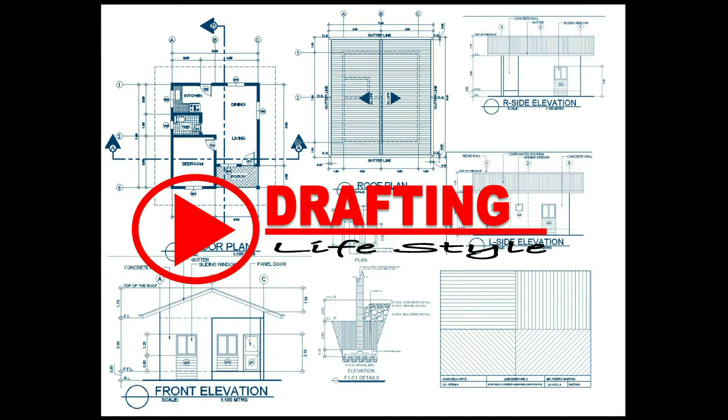This week, I'll teach you how to set up A3 paper, which will give you another option of a printable paper space or size that can be used for your AutoCAD works. This video tutorial was requested by my students to have at least an A3 paper size for their upcoming project. How are we going to start?

Of course, we need our AutoCAD here, and I have prepared some drawings that we are going to need to plot our work on an A3 paper. As you can see, we have here the floor plan, roof plan, front elevation, rear elevation, left and right side elevation. So we already have one of the most important components or requirements in a working drawing, or part of an architectural working drawing. So, without much ado, let us start with our work.

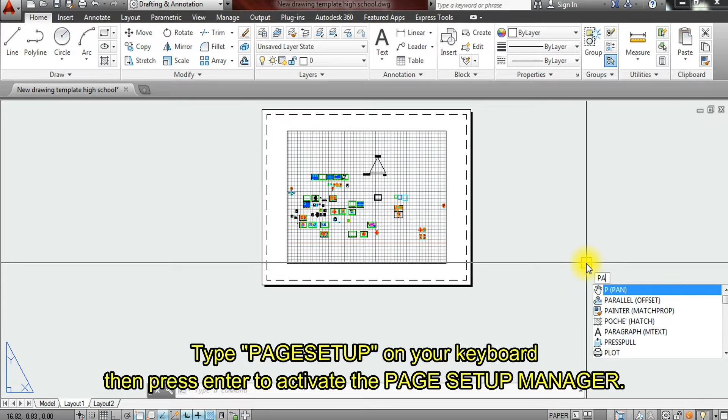So here, we have to click on the layout space because in the layout space we will do our work on the A3 size. So how are we going to start? Of course, by right-clicking here, as you can see, Page Setup Manager, or simply by typing Page Setup, enter, and then we will be directed to the Page Setup Manager.

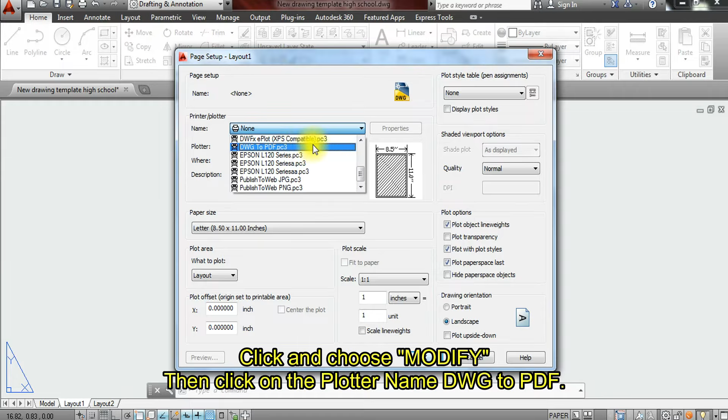So here we have Layout 1. What we are going to do is click Modify, and automatically here we are going to have the DWG to PDF. That's the format we need to start with.

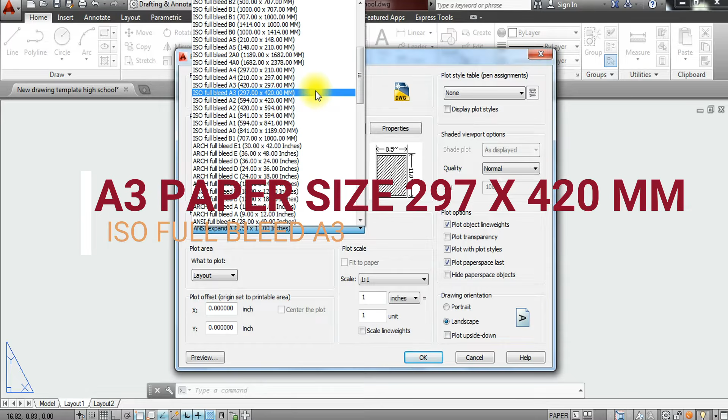After this, we are going to look for what we call the ISO Full Bleed A3. So what are we doing here with the ISO Full Bleed A3? The size of an A3 paper is 297 by 420 millimeters. This is the standard size of an A3 paper.

So what you are going to do is just click here, and then to edit the margin space or printable space of our A3 paper, we're going to have properties, then custom paper size, add. Now here, we are going to start from scratch. Make sure it's checked or ticked, and then click next.

Now, since we already set up in a previous video the short bond paper, long bond paper, and A4, and now we have the A3, everything is already set up here.

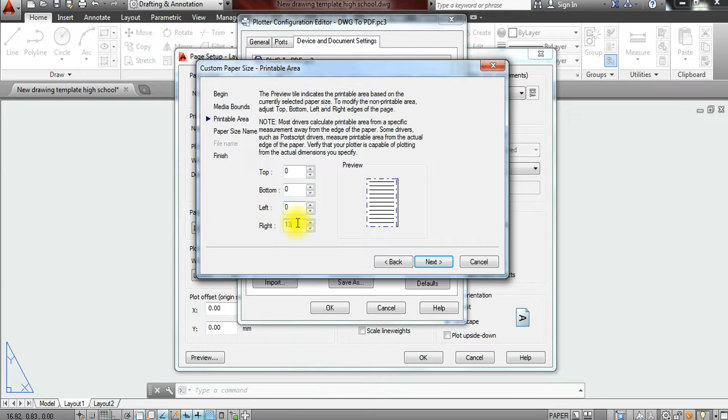So in the last video, when we talked about A4, we already changed it from inches to millimeters. Once that's done, just click next. Convert everything here, the margin space or printable area, into 0 so that the whole space of the paper is printable. So I'm going to change this into 0, change the value, and then click next.

So what I'm going to do here, when we get to the paper size name, we are going to change the name of the paper. What should we do? Type, for example, 'my new A3 paper' or 'my A3 paper size,' or whatever file name you want.

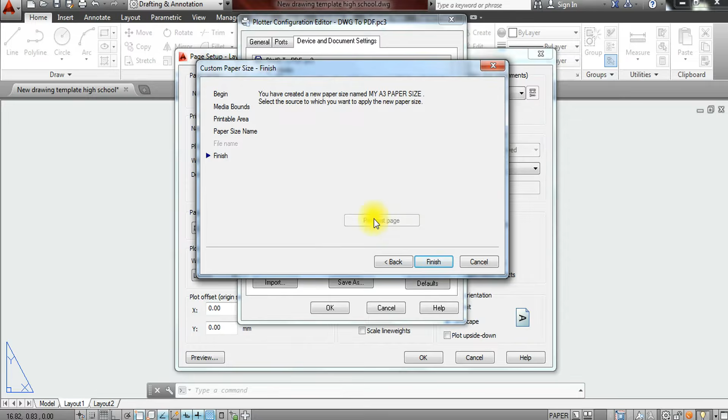Then click next, and sometimes DWG to PDF shows up, and when we click finish it doesn't get approved or doesn't let us finish. So what you have to do there is just add a number, like A1, 2, or 3, so it will accept it. Once you've done that, just click finish.

Then you just press OK, and then you are going to look here in your paper size for your A3 paper. As you can see, I have prepared many A3 paper sizes and different paper sizes that I'm going to use for my work. So here, A3 paper size.

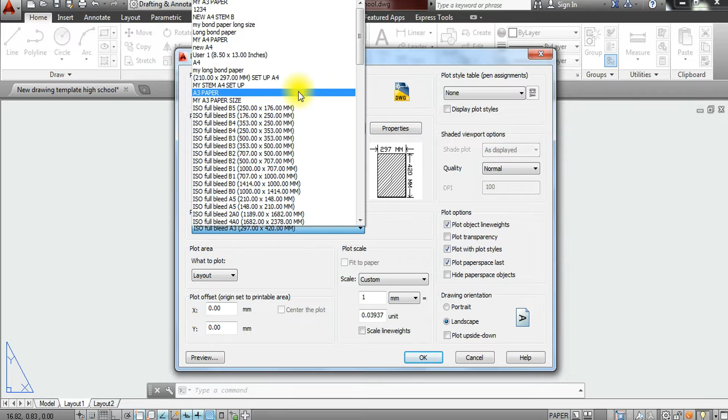Then here in the scale dropdown, you have to choose 1:1. Once it's automatically set to 1:1, you have to choose what kind of plot style table you are going to assign for your work.

So in my first attempt, I chose monochrome. This time, I'm going to choose ACAD, but you could also change this along the way if you want a monochrome setup. Of course, you know what monochrome is - that's when we want pure black and white work only. But if you want ACAD, that's where all your assigned colored layers for your work will show up.

So once you are done here, we won't be changing anything else in the layout.

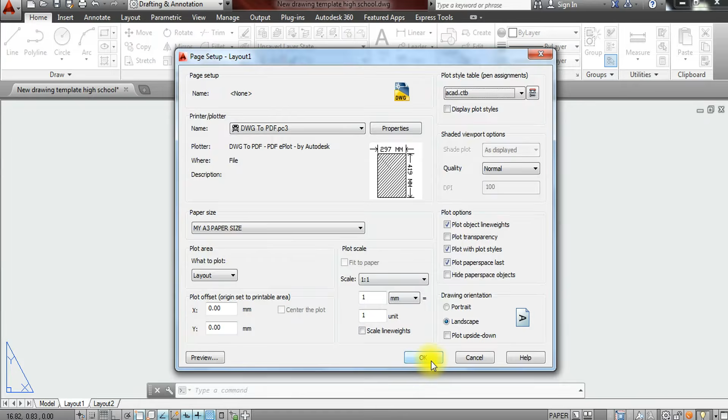And then you just press OK. Now here, modify the layer - don't need to click modify, just have to click close. Now as you can see, our M view earlier has shrunk.

So that's our viewport. What I'm going to do is erase this one, because we don't need that M view. So we'll create a new viewport. I'm going to rename this by right-clicking, rename, for example A3 paper - A3 for me.

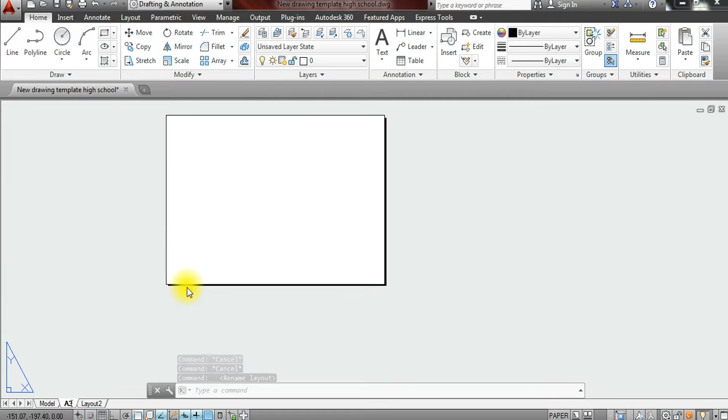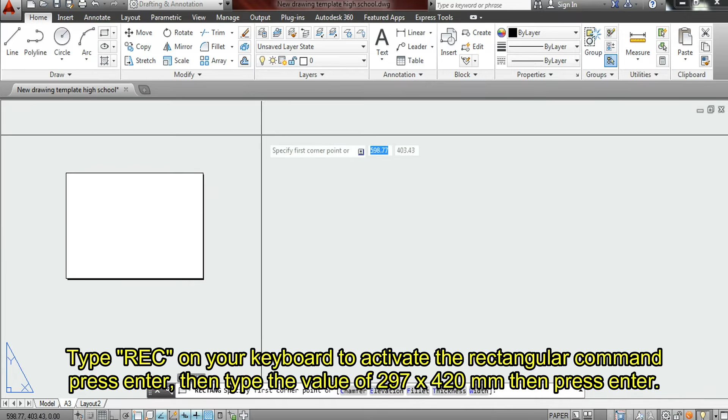Now here we will start with our new borderline. Since A3 is bigger compared to A4, both long and short sides, more drawings fit on A3 paper. Remember, our size is 297 by 420 mm. So we'll draw a rectangle by pressing the rectangular command, and I'm going to type 297, tab, 420 mm.

Since this is in landscape form, you can just rotate the drawing to make it landscape. Earlier it was portrait, so we have to change it into landscape, then move the drawing and target it as much as possible to the edge of the paper. Just click here, point the mouse pointer to the edge of the paper, and boom, we already have our rectangular object along the edge of the paper.

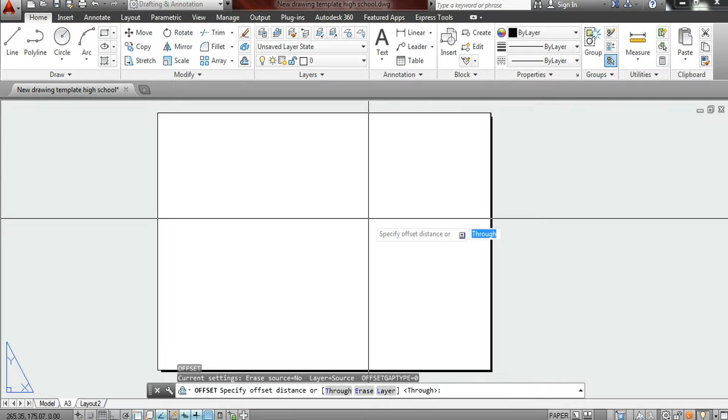Now let's create a border here. Since we are working on layout space, everything changes into millimeters because the paper size we're using is in milli. So I'm going to create an offset command here using 10 - 10 millimeters is equivalent to 1 centimeter. So let's just click it.

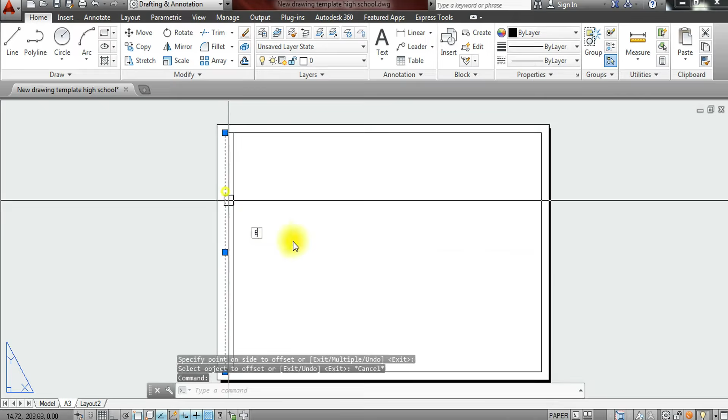And then explode the inner box that we have here. I'm going to create a bigger space of border on this side, at least 10 again. You could increase the size of this border or margin if you want - some use 25, some use 40, that's fine too. Once we're done with that, I'm going to highlight this inner box that we created.

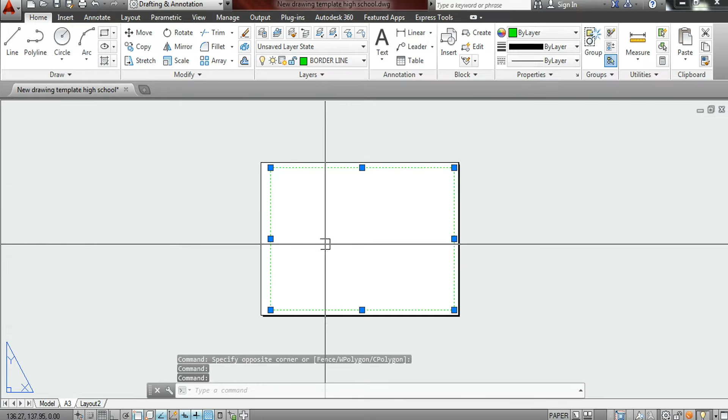And then I'm going to change our layer right away into border so it can already be a thick line on my paper size. Now let us focus on the blocks here, because it's the new title block and border line that we are going to have.

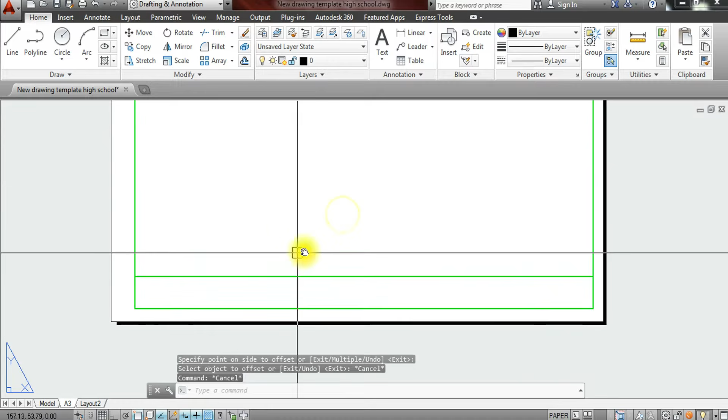So let's offset into 25 and pick the line at the bottom going upward. Once we have it here, remember, when you want to stop the existing command, always press escape - one of the things a draftsman sometimes forgets.

So let's offset again for our size here, for the text - we have 5. And we're going to offset here 25 on both sides, 25 going to the right, and then one going to the left.

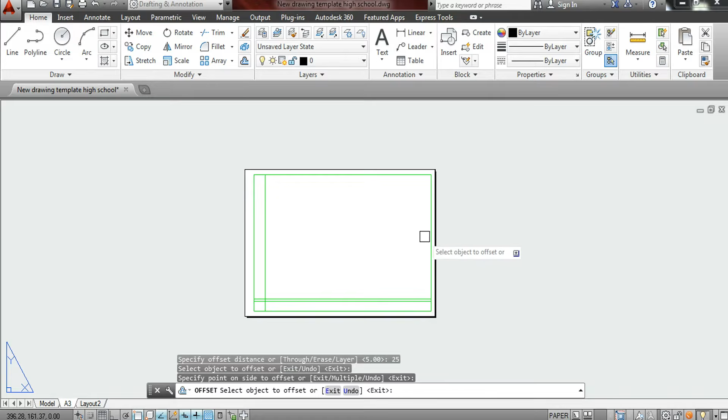Now here we are going to create an offset of 70 millimeters, 3 times - 1, 2, and 3. This is where we're going to place the names: who prepared, recommending approval, and then approved.

Because this is one of the tasks of our students, who will submit an architectural working drawing of their own desired floor plan, including roof plan and the 4 elevations - that's our requirement for them. Which means they are going to prepare 3 signatories.

So let's offset at the bottom by 5 for the descriptions of each part of the names, including the project title we'll place as the location. So we already have our divisions of borders, which means we are going to proceed by placing text.

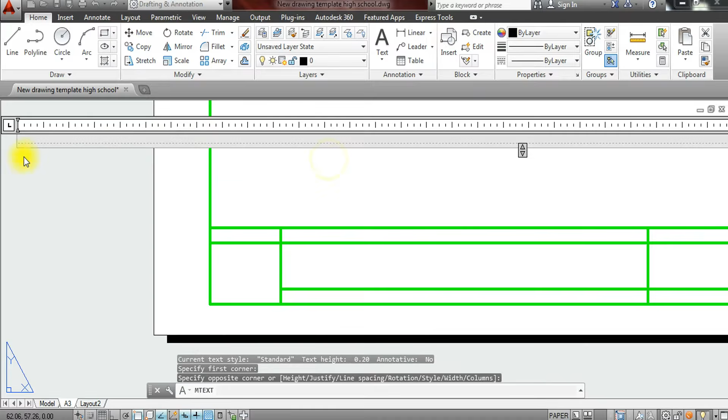Of course we already covered how to place text in the previous tutorial, but we are still going to apply the same procedure here. Click and drag, and then I'm going to type here 'school' and a colon, then highlight the text and change it into 2.5.

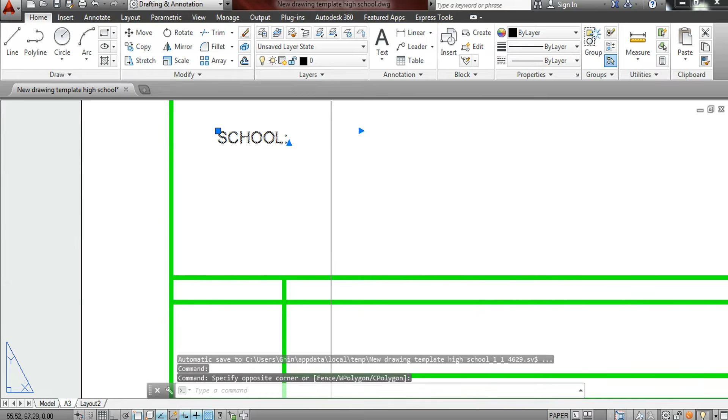Remember, everything now here is in milli. As you can see, the text looks big, but when you click outside, the text is actually small - this is only 2.5 millimeters. So layer it right away with a text layer, and I'm going to move the text to its desired position, here.

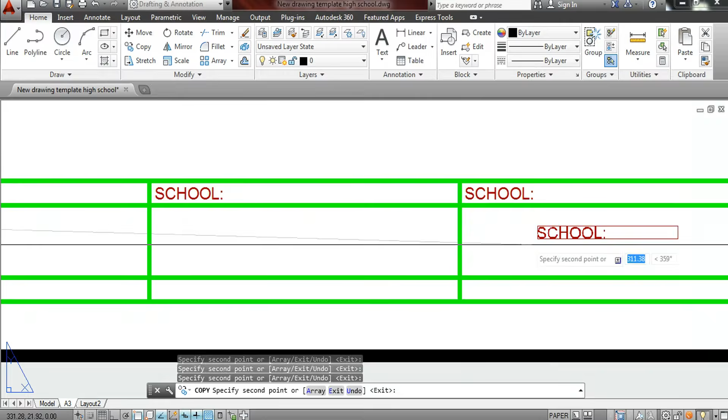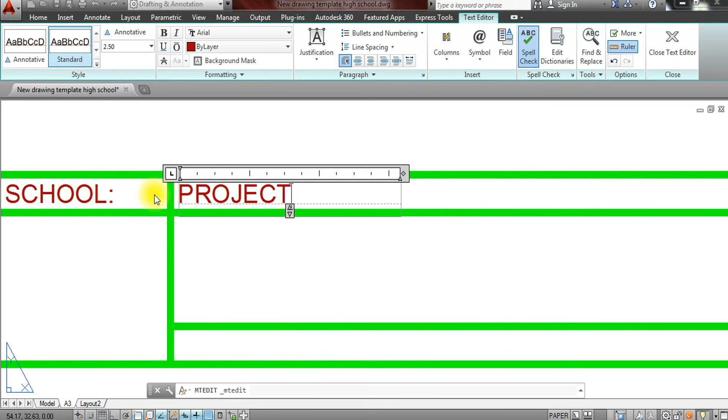And then I'm going to copy this 'school' label to all the parts we have here, and we are going to edit it right away. Let's click it first with a base point. Now here in the first one we have 'school', in the second part we're going to place 'project title', with a colon, and then here 'prepared by'.

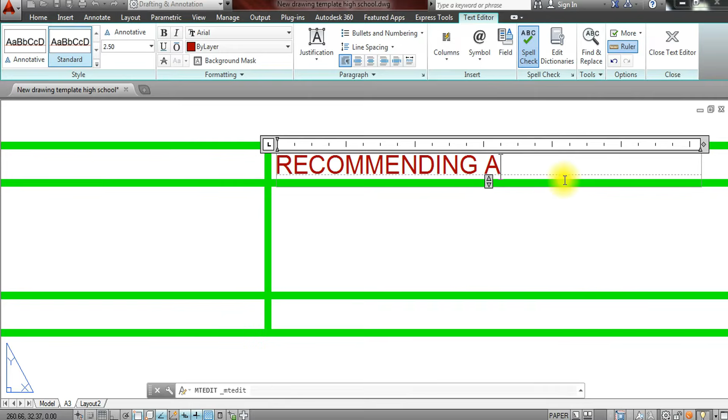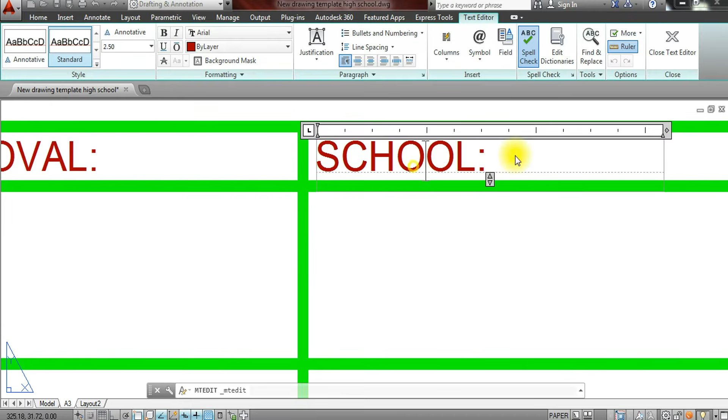The next we have here is recommending approval. So if we are going to work on a company or a firm, this is the second in command of the organization. Recommending approval is your boss, next to your highest official. And then for the last, approve, which means the highest official of the entire organization. So approved by, but for our school purposes activity, I have it here.

So prepared by the students. Here we have the parent's name and then the one who will check. You could also change it if you are going to have it on your school, depende on what you want to do. Depende kung paano ang format ninyo, maraming format ang pwedeng mangyari.

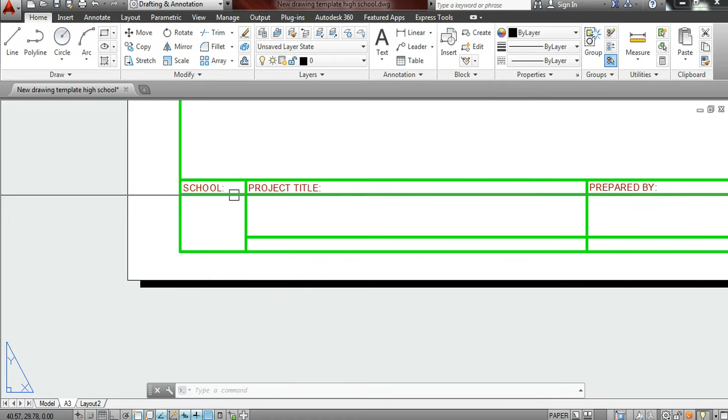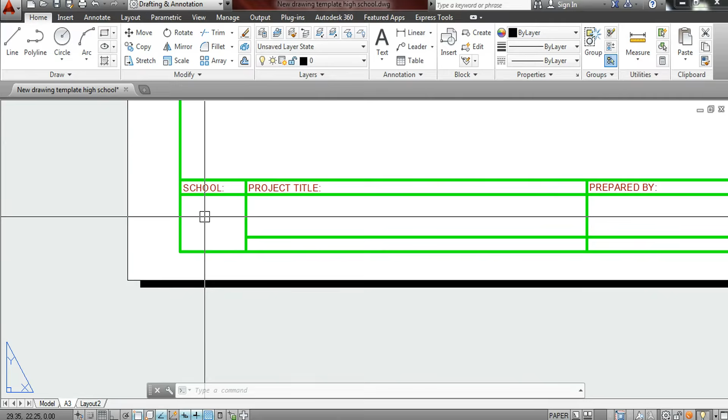There are times also this is being changed. Here, ibang nilalagay, ang lisensya ng gumawa. It includes their PTR number, PRC number, issued place, issued date, and the TIN. Ibig sabihin, kapag license mga drawings na such as working drawings na isa-submit for building permit sa City Hall, requirements for acquiring house plan for yung building permit, kailangan nun para gamitin at kailangan para sa mga lisensya. So ang lisensya ng gumawa should be a registered engineer or an architect, kasi ilalagay doon ang mga license number.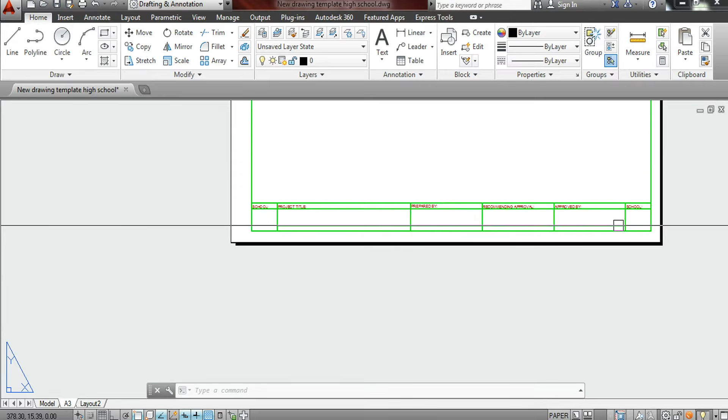Proceeding here, I'm going to copy this one again. Copy here, and then I'm going to change the size. I-drag ko na lang ito, highlight the text, and then change this into 4. So lumaki na gusto natin ang ating work.

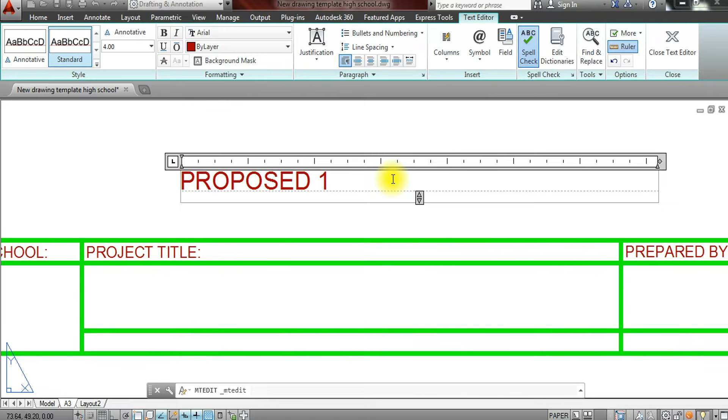I'm going to type here the title of our work. It's Proposed 1-Bedroom Residential Plan. Now the title of the drawing varies depending on what kind of work you are doing. There are times, pag 2 storeys, so Propose 2 Storeys Residential Plan, Propose 3 Bedroom Residential Plan. Depende po kung ano ang project na bino-work ninyo.

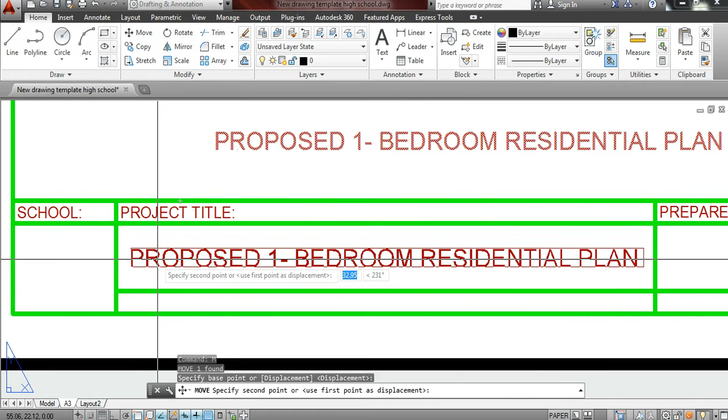Here we are going to move this work or this title text to the center. And then sa baba, we are going to place the location of the structure, kung saan ba siya itatayo. This will vary on what your professor would want placed sa baba. Maraming klaseng borderline ang pwedeng gamitin, but for our school projects and school purposes, this is our format.

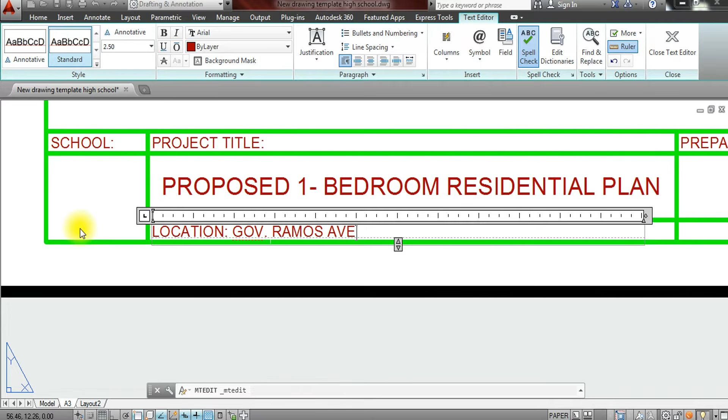So I'm going to place here location of the project. Saan ba ito gagawin? For example, we will have it here: Governor Ramos Avenue, Santa Maria, Zamboanga City.

This is our name or the address of our school. Dito is for example lang po ito. But if you're working on different sites or different address, you could also place it sa baba.

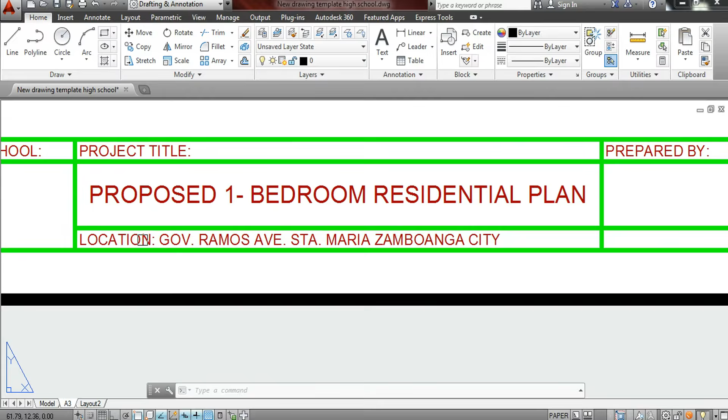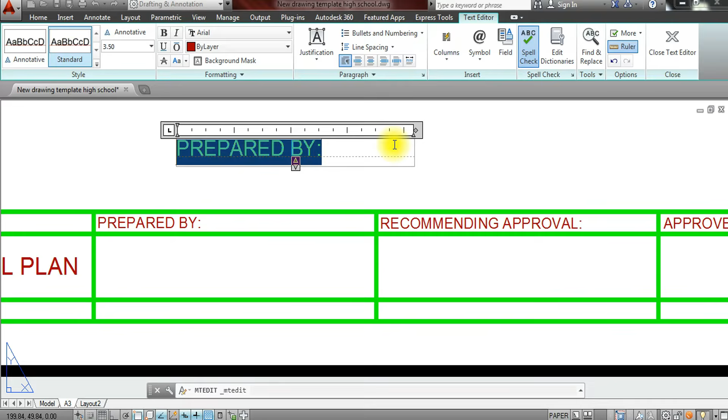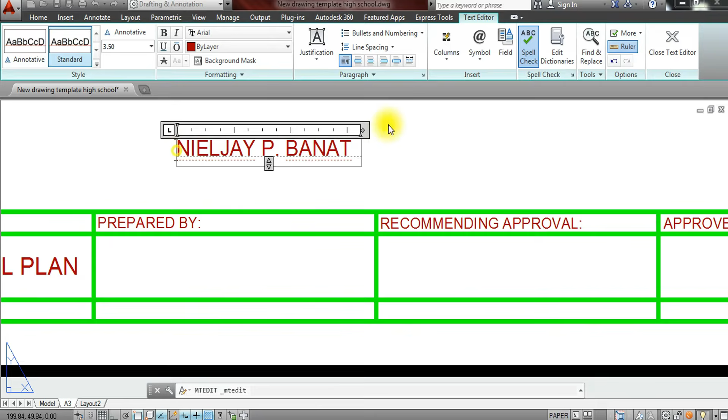Here we're going to have the person who is going to draft the project. I'm going to change here the size into 3.5. Enter, and then drag the line kapag hindi na tama or hindi na kasya sa inyong space. For example, we are going to invent a name, Nieljay P. Banat, sample lang po.

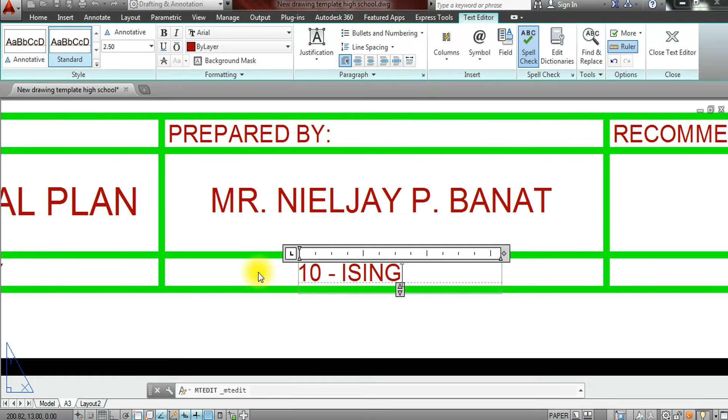Now if this is a college student, you can place here second year architecture, BS architecture, BSA, BSB 3, BSB architecture, depende po kung ano ang section or description dito sa baba. So sa amin, we will just have it here as a section of the students.

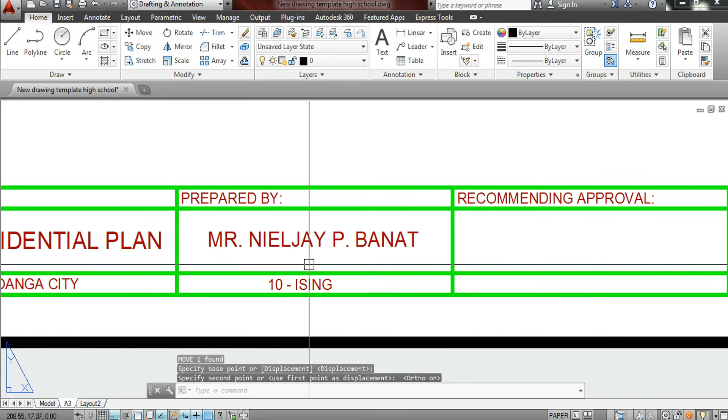Now here, we are going to copy this one which includes the section for the recommending approval, kasi it includes the approved by, para i-edit na lang natin. So we are going to have here, say for example, the name of the parents. Sa amin, our requirement is only to have it signed by the parents.

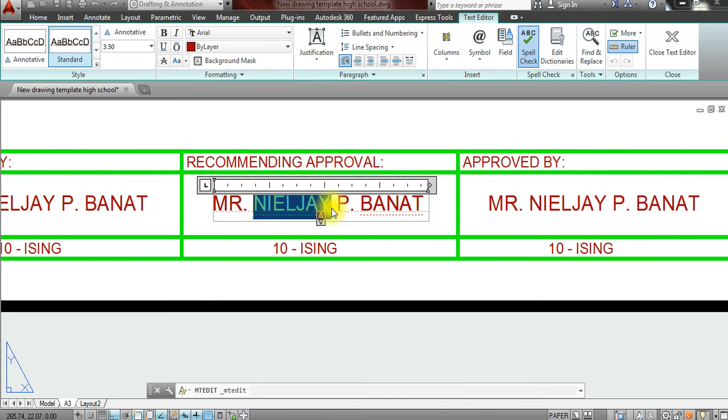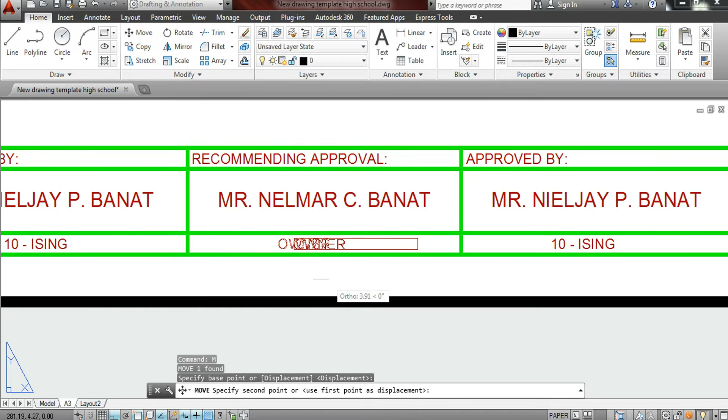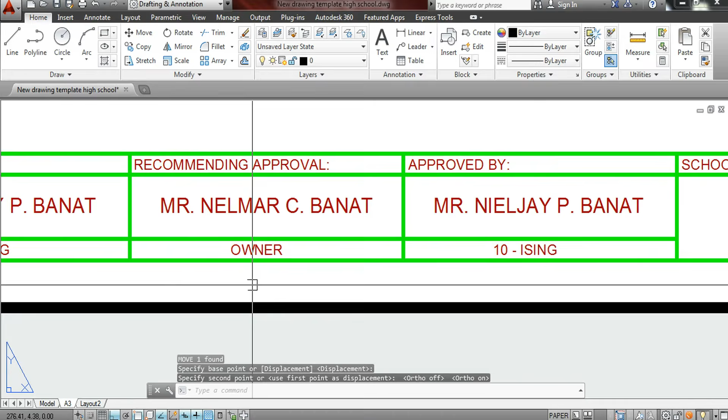So for example, Nelmar C. Banat, which is the name of the person who's going to sign or the owner of the structure. If this is the owner, we place it here as the owner, and then move this text. If you find it difficult to center the work, if it's not too straight, turn ortho on or off. F8 is the key para straight lang ang pag-move natin sa kanya.

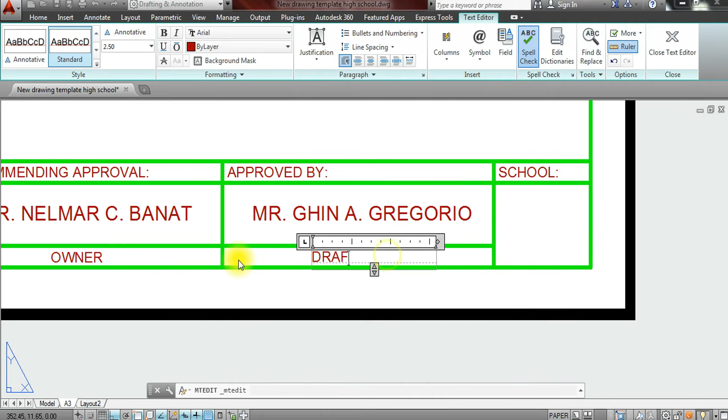Since we already have the name for recommending approval, this time we are going to place the name of the one who is going to approve. Since this is for school purposes, we will just type the name of the instructor who is going to check the work of the students. I'm going to place only 'drafting teacher' - nothing more, hindi masyadong magarbo.

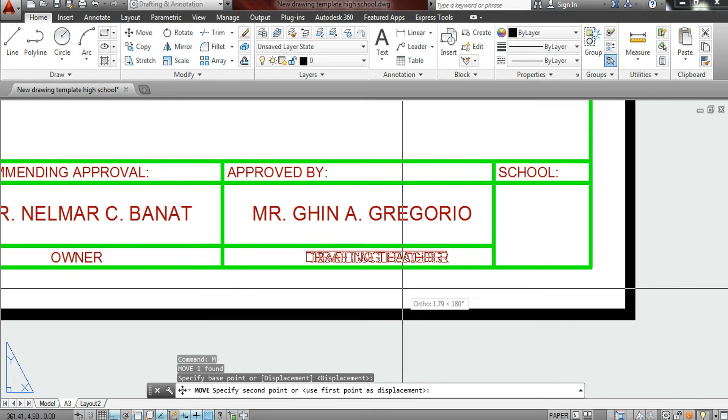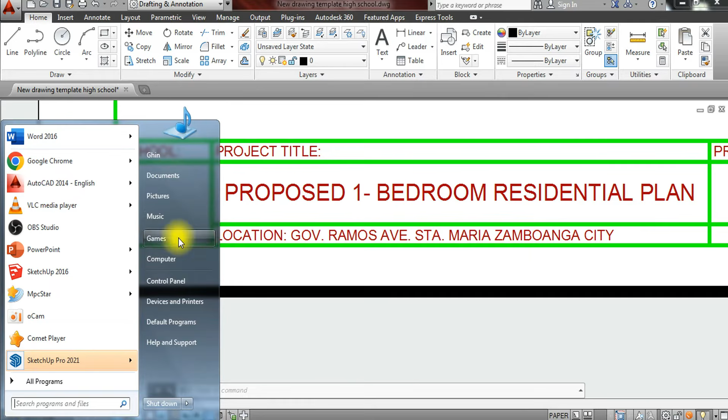Then move to center our work. Okay, everything should be balanced. And then we are going to place a school seal. So we already have it here in our work, yung school seal namin. We're just going to get it from downloads, and then you could also place the name or logo of your company, which will be also very important.

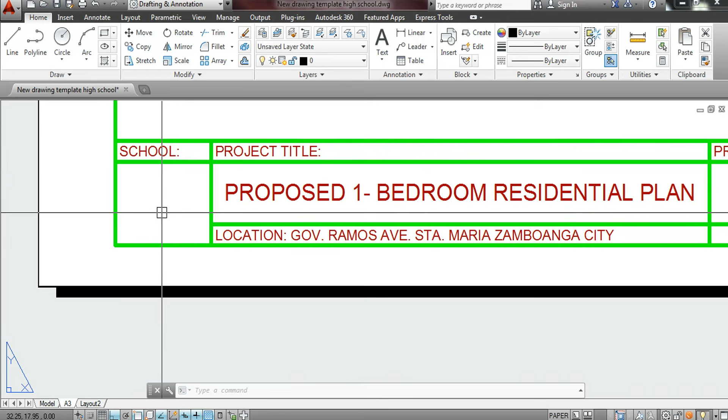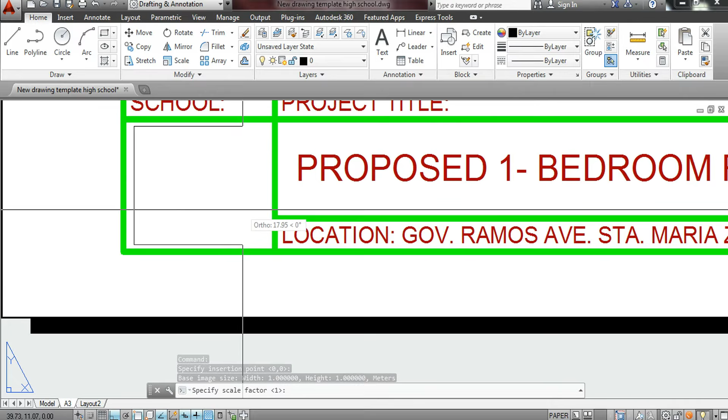So copy na lang natin to, and then when you place a picture, go back here, Control V, and then select the area you are going to place the text or the picture, and then just drag it a little upwards. Click lang natin siya. Pag na-click na po natin, you just press enter. Sometimes hindi na kailangan ng click, enter na lang 2 times.

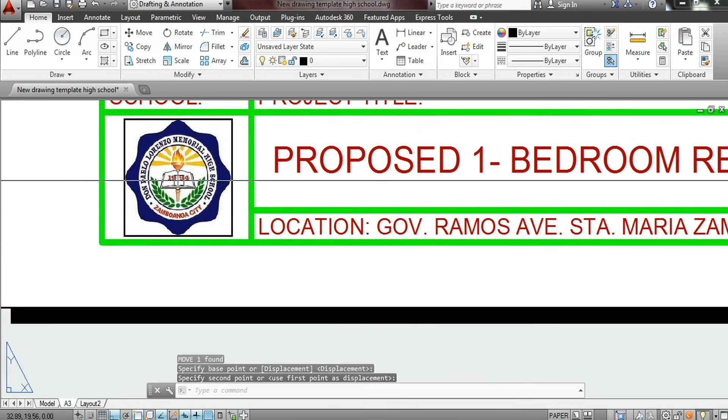Move to center the work. Kung hindi pa center, just move it to the center. Kayo na bahala mag-adjust, basta kailangan everything should be on center. So, if you are already satisfied with the position of the school seal, then that's the time we proceed to the last part.

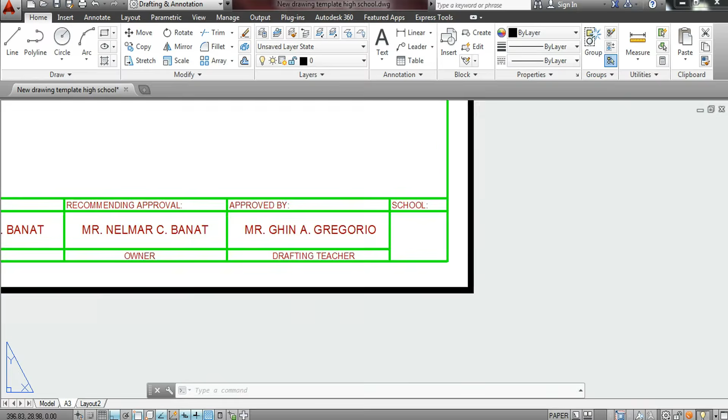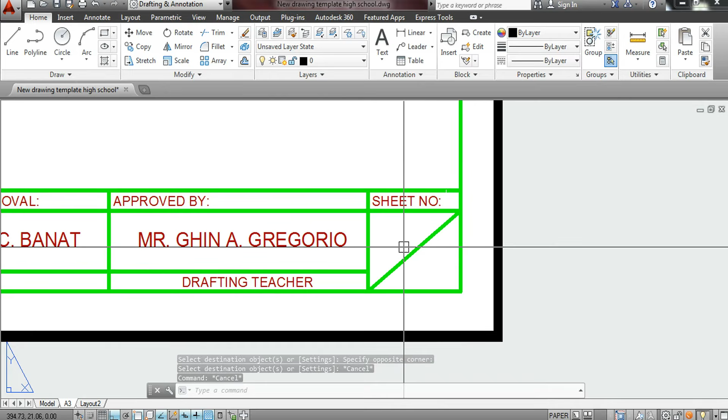Which is, should I say, sheet number. Sheet number, colon, and then I'm going to place a line in between kung ilang sheet number bang kailangan. There are times you only need 1, but there are times marami rin ang kailangan. Kasi kapag hindi na kasya sa ating work, sa space, drawing space natin dito, then therefore we need to add more sheets for our work to be more presentable. Okay, pag hindi na kasya, so I'm going to type here 1.

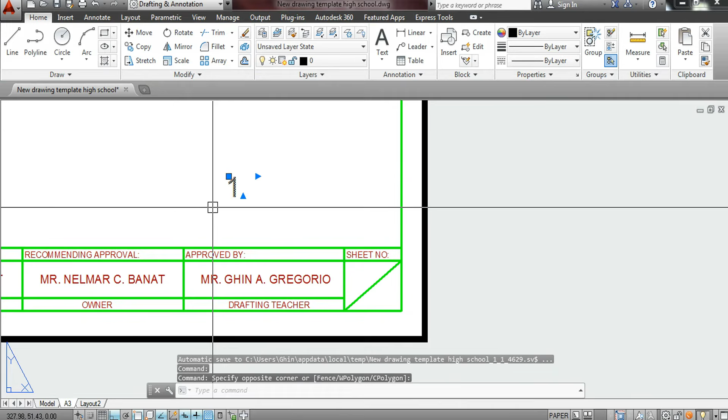So I'm going to change it here into value of 8. And then layer it right away with a text. Move the text here. Now, if for example dalawa ang sheet ng gagawin natin, I'm going to have it as 2. So, we have it here as one of 2.

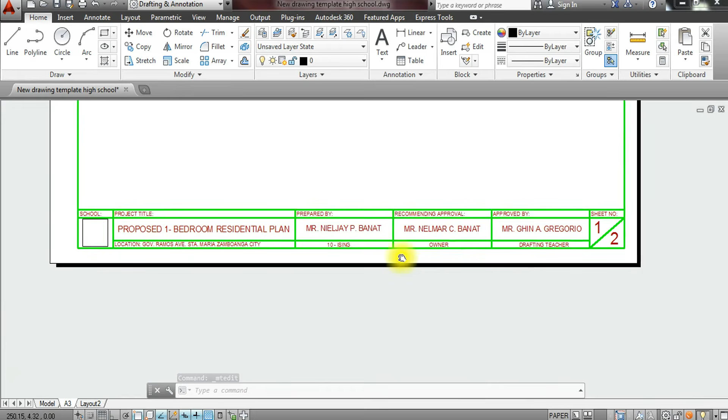So, let's say for example we have to check first before we put our M view. School proposed 1-bedroom residential, location Governor Ramos Avenue. Prepared by, okay, 10 Ising. So if you want, you could also change this into other sections - recommending approval, and then the one who is going to check, and so on and so forth.

So recommending approve na. And then, anyway, if you commit mistakes along the way, upon checking nyo, there are times, as you can observe, na minsan nagta-typo error. You can just edit it right away. Now, there are also some tricks that from PDF, you can convert it right away with CADWorks, through import lang. I'm going to have also another tutorial for that, kasi madali lang talaga siya.

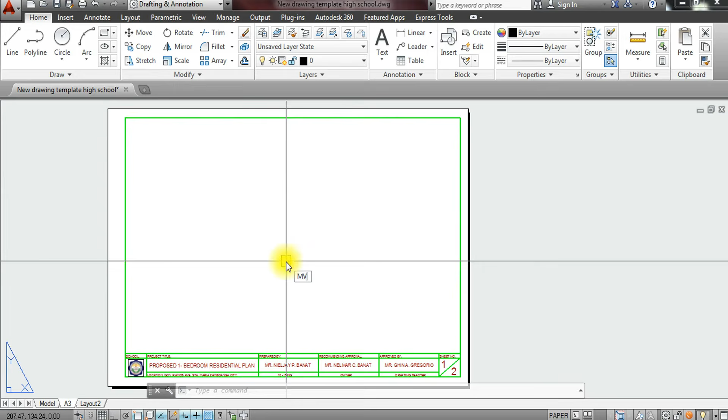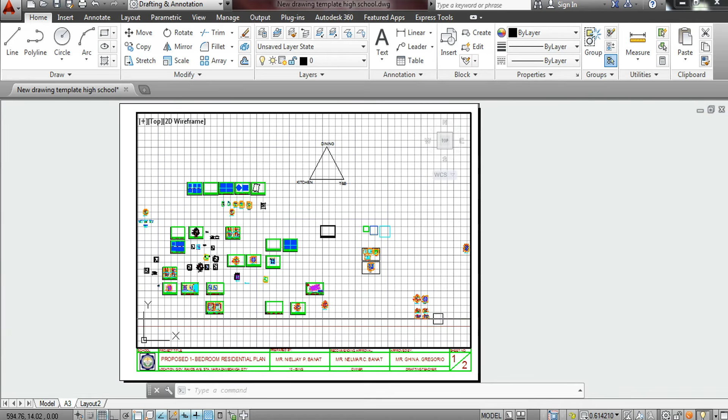So, here we're going to have the MVIEW. Select the corner here, pwede dito, pwede rin dito. So dito natin simulan, and then click to the opposite. So nandun ang ating work sa loob. Remember, we can only access the work sa loob if we double-click inside. So pag lumabas na itong top 2D wireframe, which means you can already access the drawing sa model space. Just zoom in a little bit sa ating work.

So dito, I believe hindi kasya ang 4 na drawings dito. Siguro kung kasya man, medyo masyadong compressed. So should I say, we are going to have it in 2 pages.

So again, when we are going to edit the scale, it is 10:1 with our work. Kapag meron pa kayong other drawings dito, such as reflected ceiling plan, detail of ceiling recess, detail of ceiling and soffit, detail of cornice and molding, pwede rin nyo siyang i-include dito. Minsan kasi we have to save space.

Kasi for every page that we are going to have, dito sa amin, ang rate ng pag-print is about 15 to 20, siguro 30 pesos. Yun ang pag-print ng A3 paper. Okay, remember A3 paper is not compatible with a standard Epson L120 printer, kasi malaki ang paper size ng isang A3. So you need a plotter printer or bigger printer for A3 alone. Medyo mas malaki siya, kaya that's why medyo mahal ang pagsingil nila.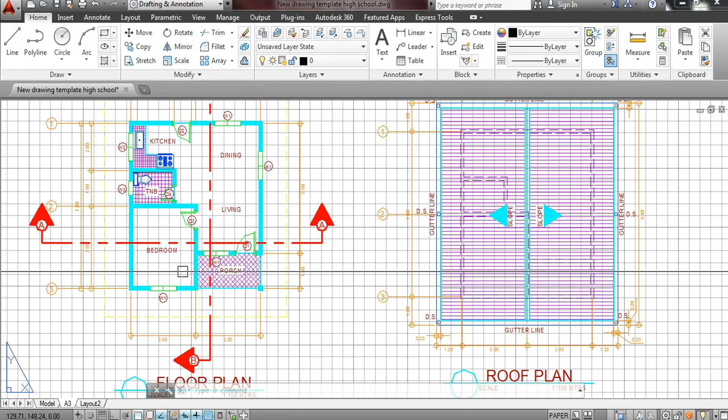Here, you just double click outside and then as you can see, we can already check our work if it is already under or appropriate with our standard. So check lang natin: floor plan, roof plan, and then bedroom, porch, living, dining, kitchen, and so on. Once we are already satisfied with our work, it's time for us to plot our first activity.

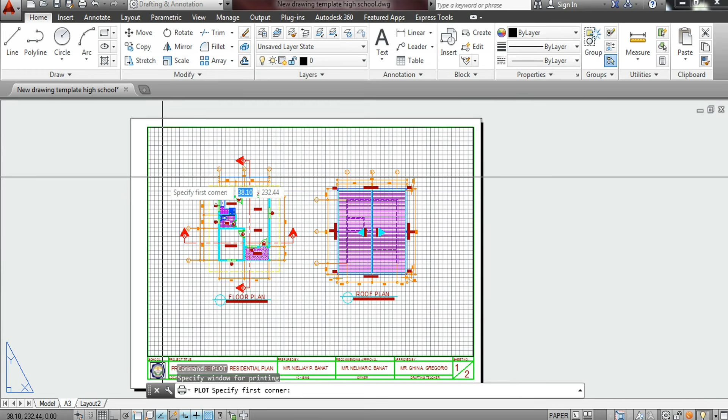So plot natin siya. ACAD, if you want to choose monochrome, pwede rin siya. And then this time, you're going to have it in Window. So pag Window, you just have to click on the upper to the lower paper size. Then center your work to make sure that our paper is on center.

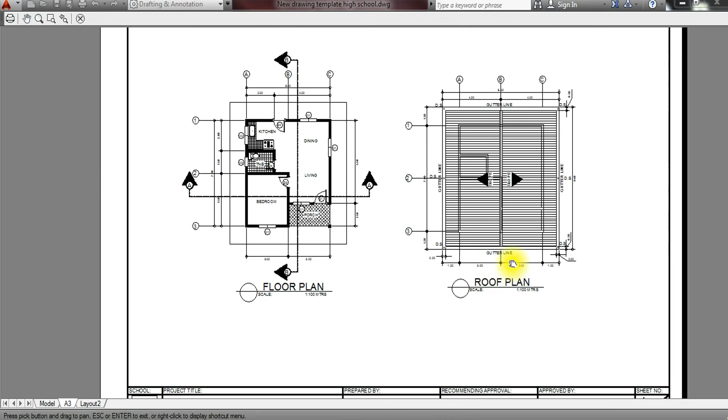So preview lang. This is our A3 paper size in monochrome. If you want to plot this right away, check mo lang muna, kasi kapag dito nagkamali po tayo, pwede pa lang dito siya i-edit. So proposed, bedroom, residential, approved by, floor plan, and so on.

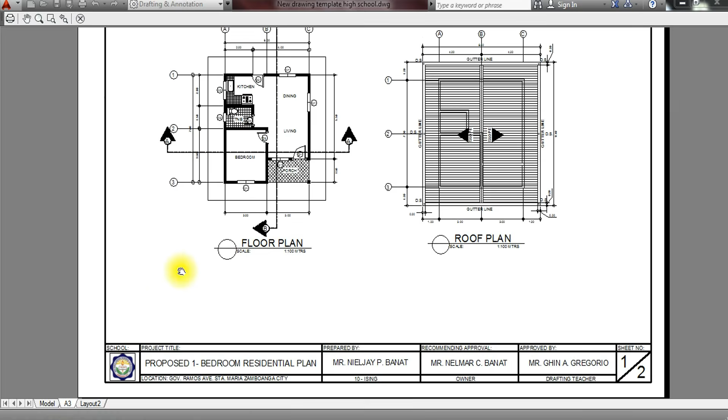If you're already satisfied, you just press apply to layout, and then okay, and then say for example, I'm going to have it here sa desktop. I'm going to save it as sheet number 1, PDF format, save. Once na-save na siya, automatically it will give you a display for your work.

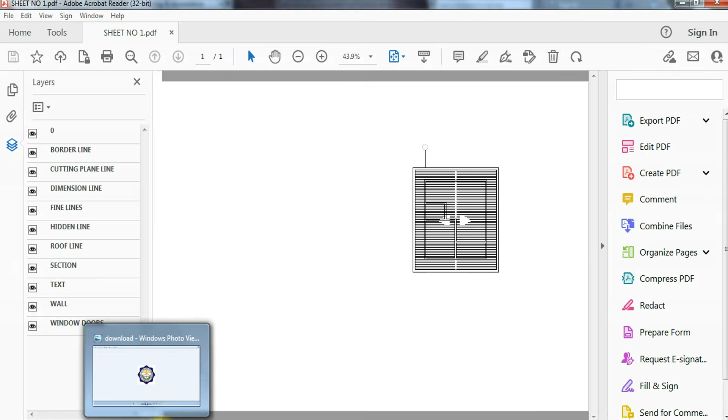So to check, if nagkamali, pwede rin pa rin siyang ulitin. That's the power of AutoCAD. Remember, when we commit mistake, it's okay, because when we commit mistake, we learn more. So let's check, okay na ba? If it's already okay, you just have to close it.

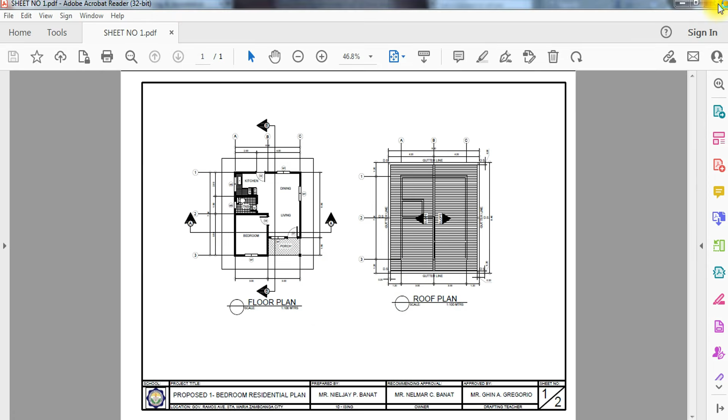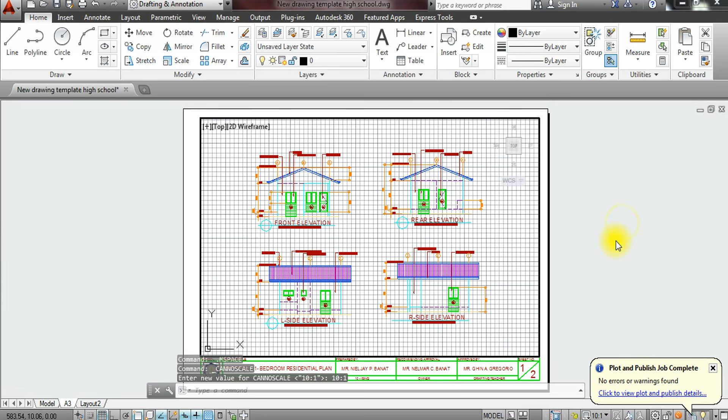And then we are going to plot the second activity again, double-clicking inside the M view, and then just have the pan command by pressing the mouse wheel to move to the certain location of your work. So here we are going to have it in ACAD form. Remember, 10:1 ang ating scale, and then just double click outside if you are already good to go for printing. Just type plot again, enter, and then Window.

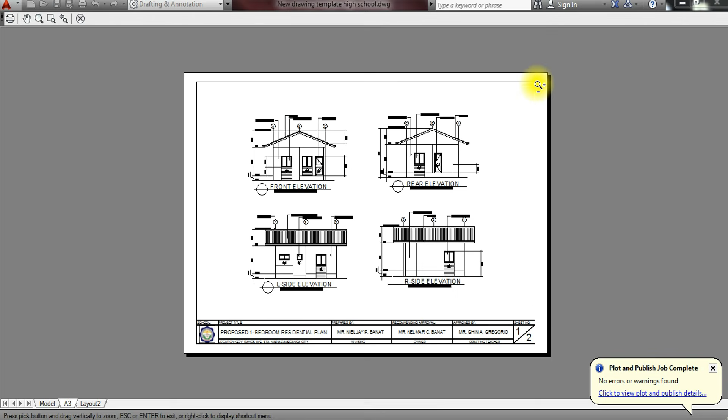Try natin i-check sa loob kung kaya. Center your work. Preview, still the same, pero problema, lumaki ang border natin dito sa side, which means it will not make it accurate. So we are going to have it again a window.

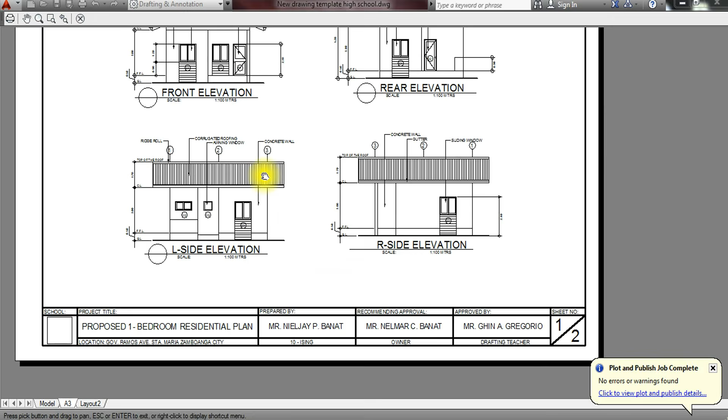Clicking here into the paper size, and then check it right away. Preview. So we already have our work here on monochrome, but we are going to have it here with an ACAD display. So ACAD po ang plot style table natin. Apply to layout and then preview. So we can see here the work of ours.

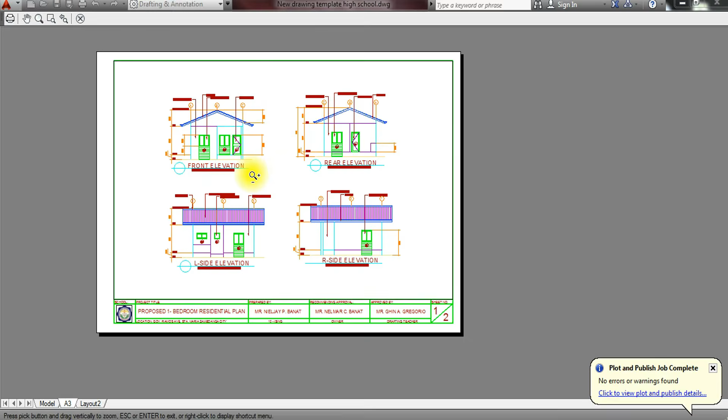Which we are going to submit to our professor. So sample lang naman po, this is an example of setting up an A3. So escape lang natin, apply to layout, and then I'm going to rename this as sheet number 2, and then save your activity.

So once it is done, you can just check your work if okay na po. Once you are already satisfied, pag pina-check nyo muna, sir, pwede pa, check mo, ay may mali dito, so you can still edit this one. But pag nasa table na ng professor natin, hindi na natin yan makukuha, kasi imamark na tayo kung saan tayo nagkamali. But it's okay, we are learning.